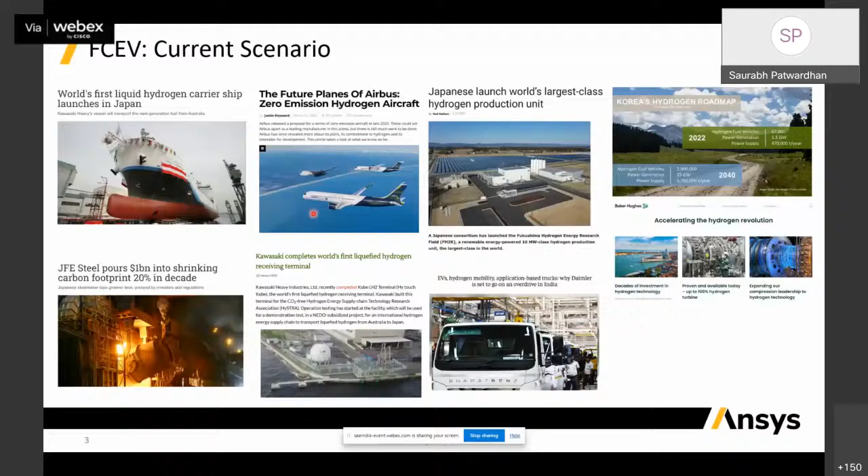So what makes hydrogen so attractive? I've compared two vehicles. One is the battery EV on the left hand side. The other is fuel cell EV from the Nikola company. Hydrogen is the lightest element and has the highest energy density. So you can see hydrogen has clearly one advantage, that is power per unit weight, making it suitable for heavy duty vehicles like trucks and commercial vehicles.

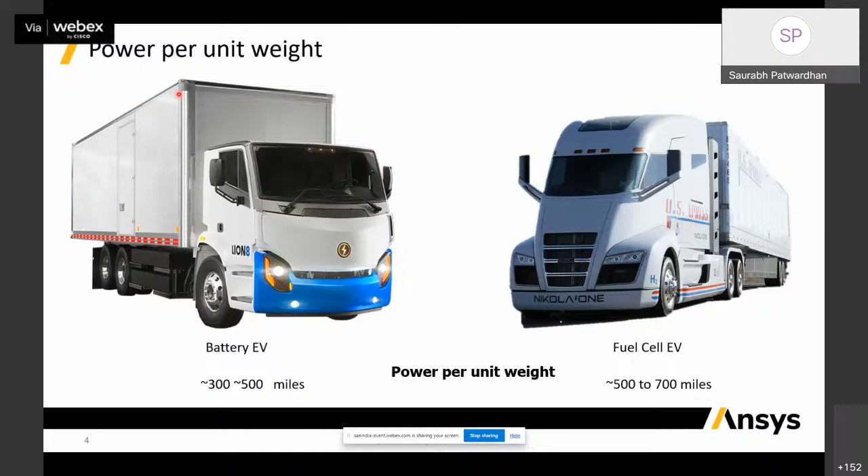It has longer range compared to battery electric vehicles. So if the typical battery EV for the same weight can go for 300 to 500 miles, the same fuel cell EV can go 500 to 700 miles. So there is clearly advantage there. That's why the hydrogen is extremely attractive. However, the picture is not completely so rosy.

So you can see there is a comparison of a battery vehicle on the top and the hydrogen car on the bottom side. So when you look at the overall efficiency, that is producing the energy using some green source, to transportation and storage, to taking it to battery, and then the power motor and transmission, the overall efficiency comes about 76% for a battery.

But if you take the same hydrogen car, starting with some green energy source, then doing the electrolysis and creating hydrogen, compressing it, storing it, transporting it, and then generating power using fuel cell, the efficiency reduces to around 30%. So there is a huge difference in the overall efficiency rate when you compare battery to fuel cell. And that's the major challenge that we have. So it has currently a very low efficiency due to high energy losses.

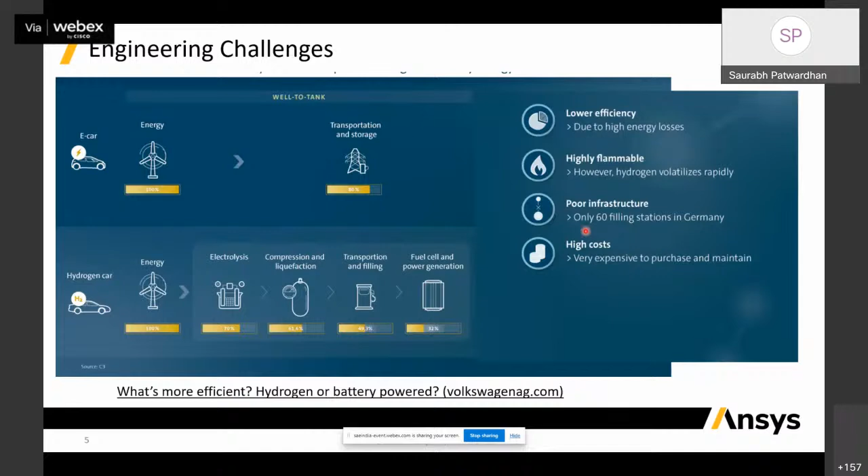The second thing that is challenging is that hydrogen gas is very highly flammable. Currently, the infrastructure is not present. So for example, in Germany, we have only 60 hydrogen filling stations. And expectedly, we have very high cost because there is no proper infrastructure in place. So that makes fuel cell extremely expensive.

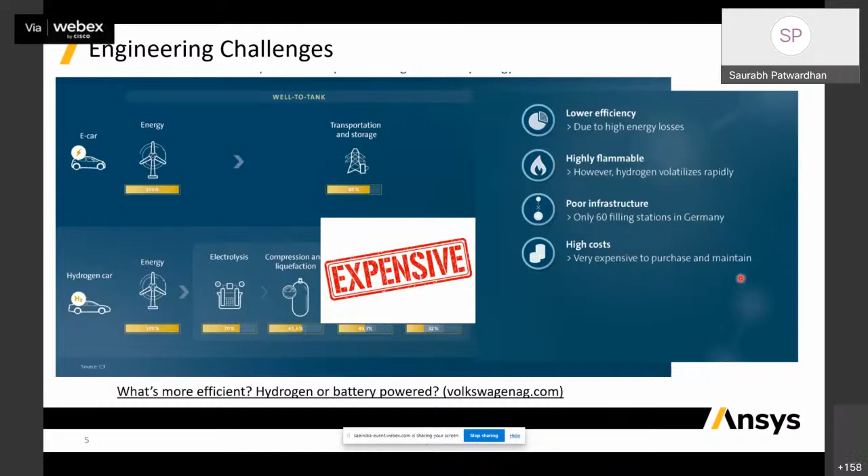And this is the engineering challenge that simulation can help to overcome. So for example, simulation can improve the design, optimize the design, and improve the efficiency. It can help in improving the safety, and it can help in reducing the cost of fuel cell vehicle. So that's why simulation has to play a very important role when it comes to accelerating the fuel cell vehicle development.

So this is a typical V diagram for design of any system. So you start with requirements and specification. So this is whole concept phase where you design the subsystem and the full system for a vehicle, and then go to the detailed design and optimization of each individual component that consists of the whole system. Once you do the whole component design, you want to check whether my design component is working fine. So you do subsystem integration and verification, and then you go to full system validation and verification to check whether it's working as per the requirements that I set out earlier.

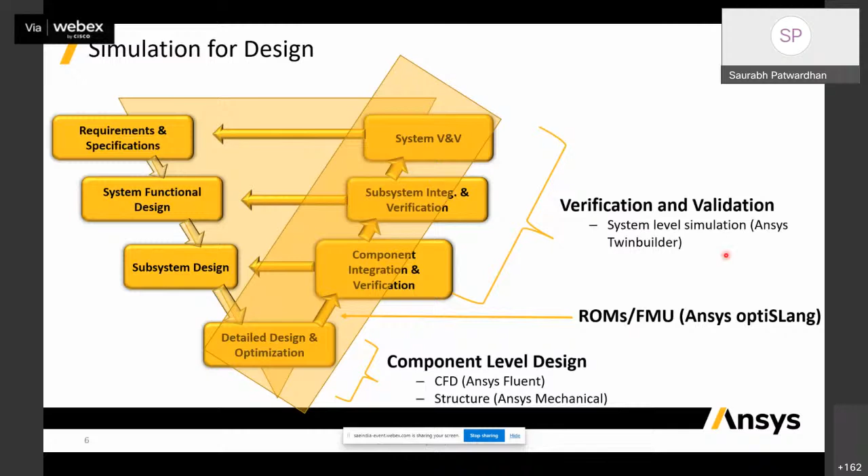In this webinar, we'll be focusing on the right-hand side part of this V diagram, that is the detailed design, then component integration and verification, and system level validation and verification, and how ANSYS tools can help at each of this step. So whether it is CFD, whether it's structure, whether it is creating the reduced order models, whether it is verification and validation. So we'll first look at component level design, mainly first from the CFD point of view, and then Dinesh will talk about the structural design.

So when you talk about the CFD modeling, what it does basically is it couples the overall design of cells and stacks and fuel cell systems, so overall engineering design, with the study of fundamental physical and electrochemical processes that happen inside the fuel cell. So here is an example of a fuel cell where you have this anode channel, you have cathode channel, where your fuel and oxidizer respectively come, and they react at the catalyst and produce electricity. So these fundamental processes are modeled when you talk about the CFD modeling, and that modeling will help you design the cells and stacks when it comes to full vehicle development.

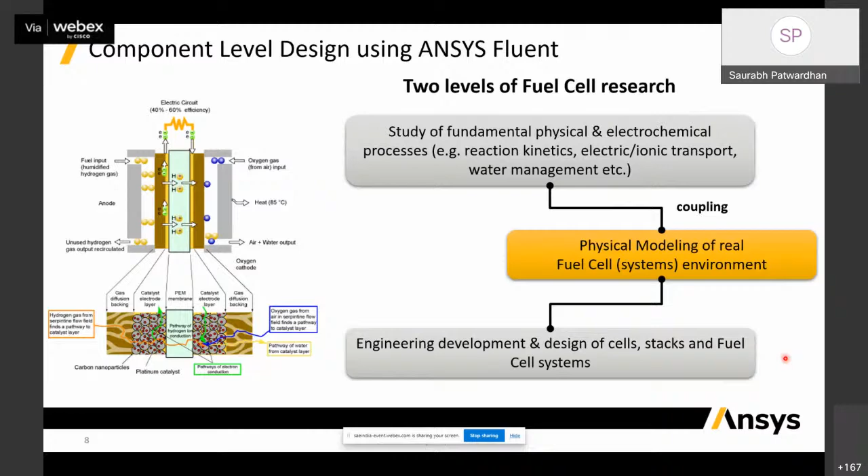So what are your design objectives when you talk about the CFD modeling? So you want to look at bipolar plate design, whether your channels will be single serpentine or triple serpentine or interdigitated. You want to look at how my species are distributed. I want to have as uniform distribution for species, current, and temperature as possible, so that my fuel cell is going to operate at highest efficiency.

Water management is extremely challenging when it comes to PEMFC because it operates at low temperature. So that is something that you want to optimize. Then there are different processes like osmotic drag and back diffusion.

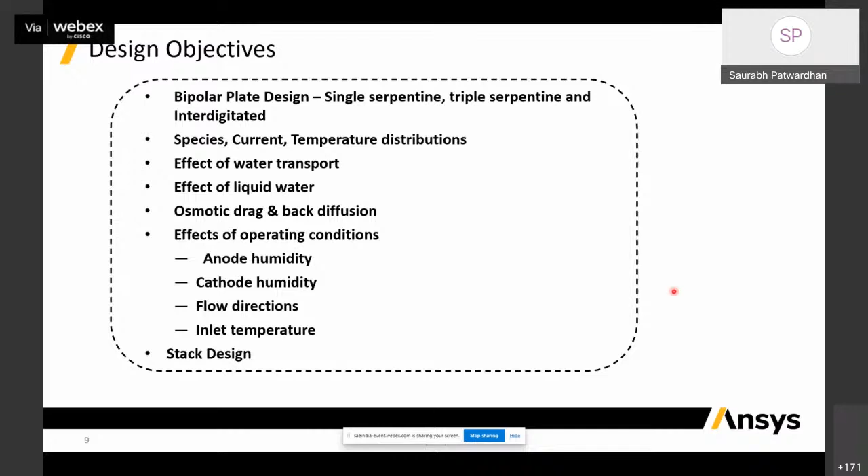Then you want to look at how the different operating conditions have an impact on the overall fuel cell operation, like anode humidity, cathode humidity, flow directions, temperature, and then you want to look at the overall stack design as well. So all these design objectives can be met when you do the CFD modeling of fuel cell.

So in ANSYS Fluent, what we do, we couple the flow simulation, that is the chemical species transport, the momentum transport, the energy transport, with the ANSYS Fluent fuel cell module, which gives the Nernst voltage, overpotentials, current density, and electric potential. So these two models are coupled through species and heat flux transferred from the fuel cell to the flow simulation, and the flow simulation then gives back to the FC module the species concentration and temperature.

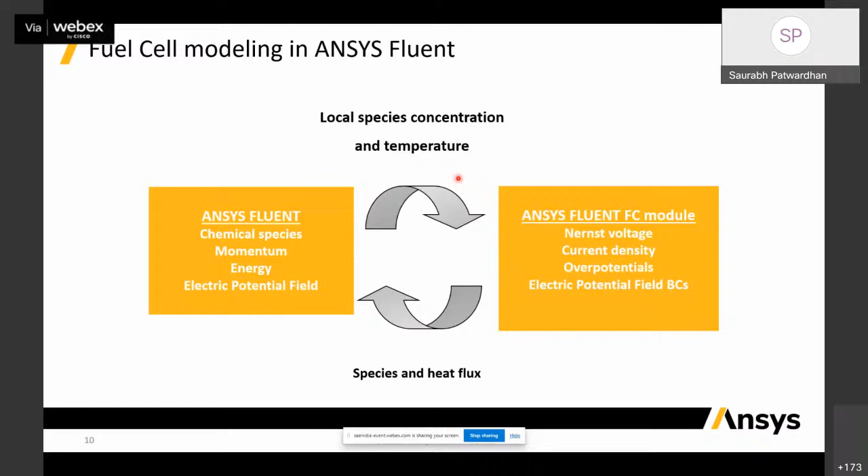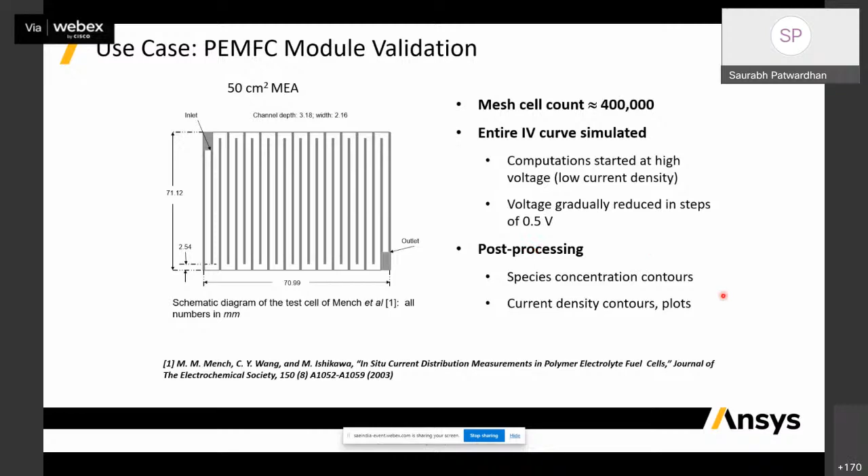Then we'll look at some use cases, how the PEMFC can help in not just validating, but understanding what are the different processes that are happening inside fuel cell. So this is a case from this paper, Mench and others. So you have this serpentine channel with 50 centimeter square MEA area. The total mesh count was around 400K. And we simulated this particular fuel cell at different operating conditions, looked at different post processing, and we'll look at how the insights that CFD can give to improve the design.

So first, this is the comparison of the polarization curve, the potential versus current. Again, we simulated it for different equivalence ratios on the cathode side, 1.5 and 2.25. So we can see clearly at lower equivalence ratio, the curve falls off at a lower current density. But at a higher equivalence ratio, it slightly continues longer to give larger current without consuming completely the reactants. But you can see the comparison is excellent with the experimental data, which are shown by these symbols. Similarly, we looked at current density at different cross sections. Again, the comparison is excellent for different voltage levels.

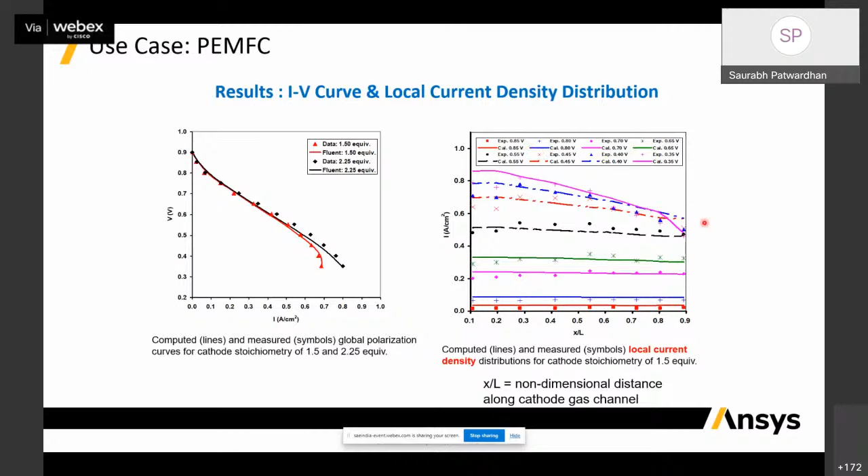But the most important point that I want to highlight is here. So this is the contour of current density on the plane of membrane. So you can see close to the inlet, you have a very high current density, of course, because of the availability of the reactants. But as the reactants are consumed, as you come towards the outlet, you see that the current density has become lower. Now, you may want to improve this and want to have more uniform current density distribution across the cross section from inlet to outlet. And those kind of insights can be obtained from such CFD simulations.

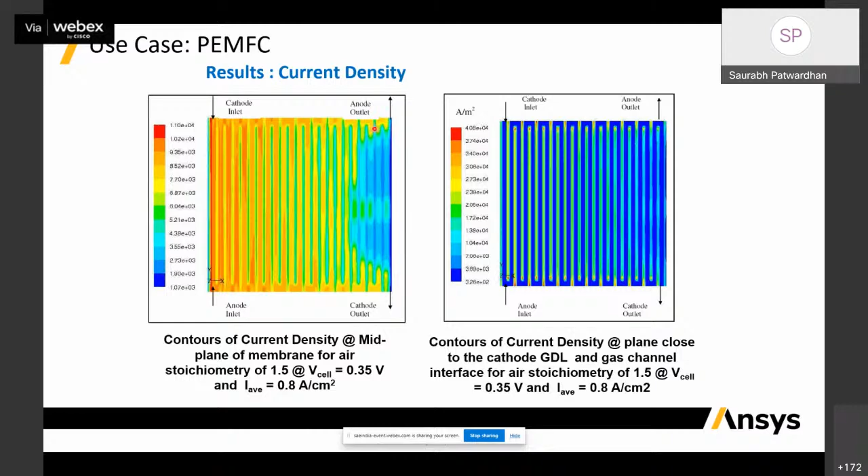Then we can not only look at a single cell simulation, but you can also look at stack simulations. So this is another use case of stack simulation. So we have 33 channels in a single cell, and 10 such cells are arranged in a stack to provide more voltage. So these are some of the details of the mesh and the CPUs. So ANSYS Fluent is a highly parallel solver, so it scales quite well. And this particular 16 million mesh model was solved on 96 CPUs and solved in 2 hours.

The important point I want to highlight here when it comes to stack simulation. So if you look at this bottom corner, we have plotted temperature contours at different planes, at a cross section and for different cells. So you can see because this is naturally cooled, you have cooling at the ends, so you have lower temperature there. But in the middle cells, it kind of heats up because not enough cooling is available here. So we did not have any coolants. It was naturally cooled in this particular example.

And this is something that any design engineer would want to avoid, because higher temperature is going to affect your other parameters like hydrogen concentration. So you can see there is a variation of hydrogen concentration across the cells. There is also variation in the relative humidity. There is a variation in the current density. So a design engineer will get such kind of insights from these simulations, and you can also design a cooling system that will avoid such situations.

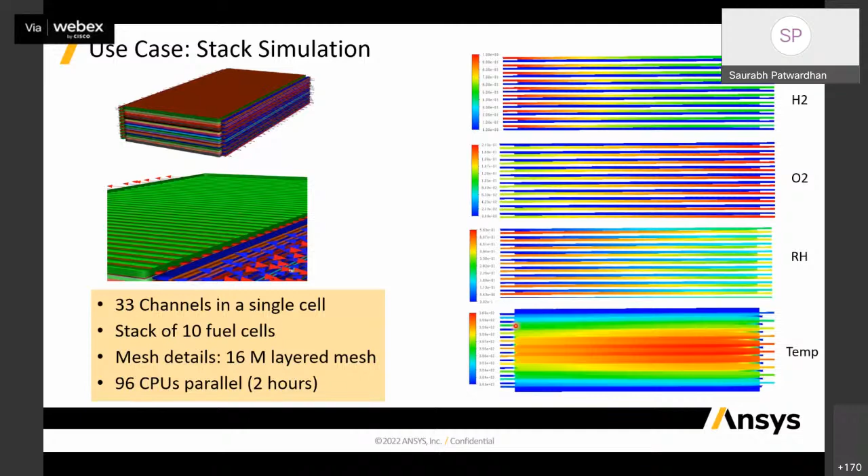So this was about the detailed CFD modeling, and then we will go to the system validation and verification, how we can achieve that using the ANSYS tools. So we'll look more into the behavioral modeling of fuel cell. So we looked at the CFD side. So we start with the mesh. We solve it in ANSYS Fluent using CFD. We get such data like polarization curve.

The next step would be to use this physics-based model, 3D CFD model, use that intelligence and put that into a system level simulation. And for that, you want to create a reduced order model. So what I mean by reduced order model is basically a functional relationship between some output variables that you want to test. It could be maximum temperature, it could be maximum relative humidity,

some operating condition parameter that you want to look into or control with all the input variables, like inflow, the pressure on the anode side, or maybe the surrounding temperature, or the relative humidity at the inlet. So those are your controlling parameters, and you want to look at the output. So we want to create that using our physics-based model. And then once you create this reduced order model, or functional mock-up unit, as it is called sometimes, you can put that into a fuel cell subsystem model.

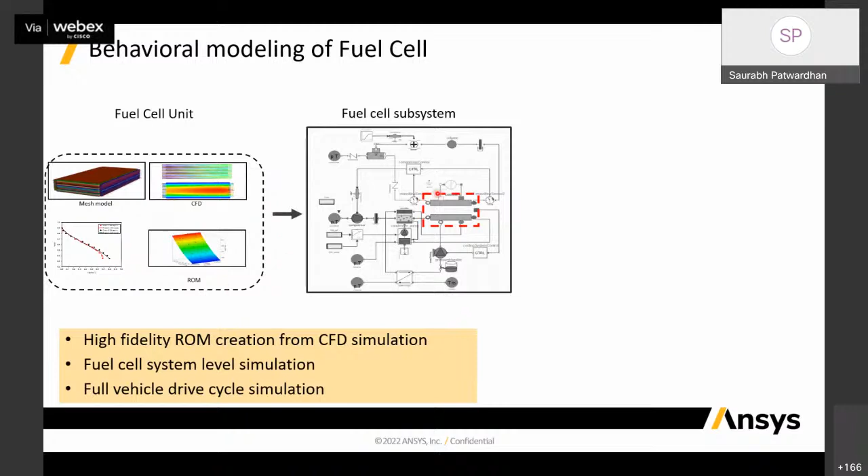So this subsystem model has different components, like it has anode side circuit, hydrogen tank, then there is a cathode side circuit where there is a compressor, there is a humidifier, there is a condenser, there is a cooling circuit here, and so on. So this particular intelligent data is going into my fuel cell subsystem model for a system level simulation.

And once you do that subsystem level verification, you can integrate this subsystem model of fuel cell into a full vehicle model, which is shown here, which has other components like battery, it has a car, and traction motor, and so on. So this is for a full vehicle model. But the important thing is that you are using a very high fidelity reduced order model that is coming from your actual design.

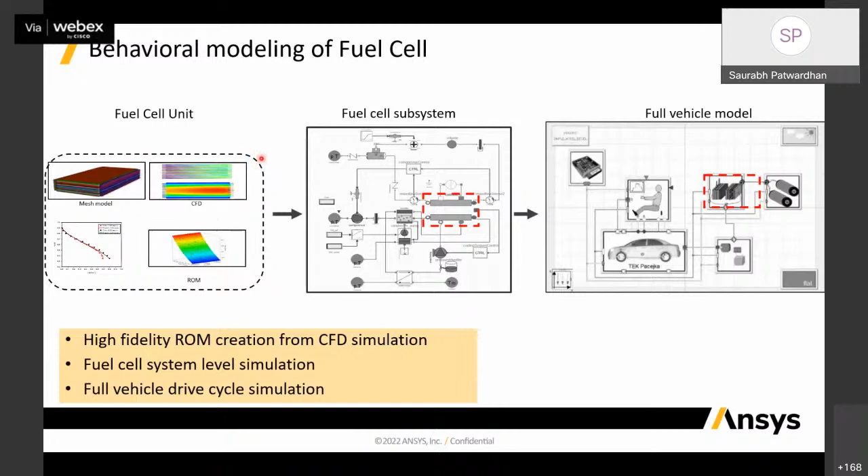So how do you do that? How do you create the ROM? So we have a tool called ANSYS optiSLang, which can allow you to do a design optimization, not only design optimization, but you can create a design of experiments. So you can create different samples for different input parameters. So here we have selected 4 different input parameters, like inflow of hydrogen, inflow of oxygen, voltage stack, and the relative humidity on the cathode side.

And these are several output parameters that you want to look at when it comes to system level simulation. It could be total current, it could be temperature, relative humidity, it could be outflow, oxygen content, average temperature, and so on. So you can create a design of experiment. So here we had 30 design points, and create a dependence table, for example. So how the output parameters are dependent on the input parameters that I provided.

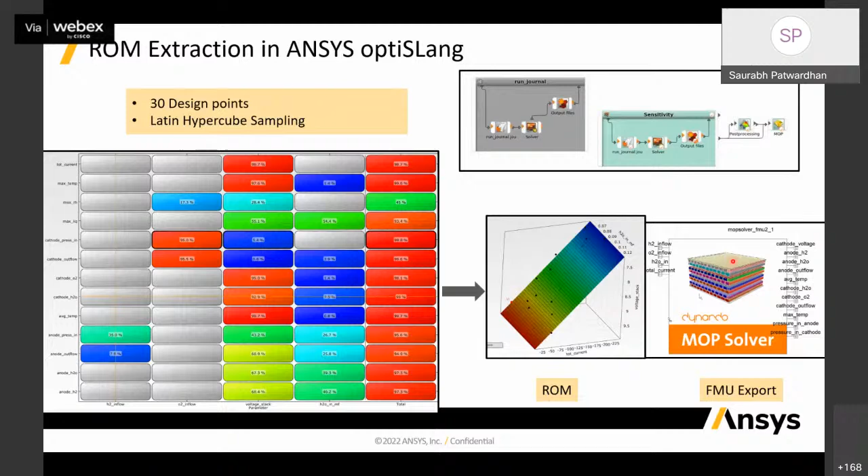So for example, the current is almost completely dependent on the voltage. But there are some variables like inlet pressure on the anode side that is dependent not only on voltage but also on the relative humidity at the inlet, and also the inflow value. So this kind of dependence matrix you can create, and then that is basically your ROM, reduced order model. So that is the functional relationship between the input and output parameters that you can export for a system level simulation. So this is the FMU that I'm talking about, with inputs and output parameters.

Not only that, you can also look at things like safe envelope. So here is a volume chart where the maximum temperature of a fuel cell is dependent on three different input parameters: cathode flow rate, stack voltage, and inlet water mass fraction. So in this particular example, suppose I don't want my fuel cell to operate at a temperature that is greater than 340 Kelvin. So this is basically my boundary surface.

So I don't want my fuel cell to operate in the region where the temperature would exceed this 340, that is the safe operating limit. So I don't want stack voltage, for example, to go below 8 volts. So this is basically a 10 cell stack. So for each cell, it should not be less than 0.8 volts, for example. So these kind of studies can be done, and you can devise control strategies. So for example, if my voltage is going below 0.8 volts, what should be my control operation, or what should be my strategy so that it comes back in the safe operation limit?

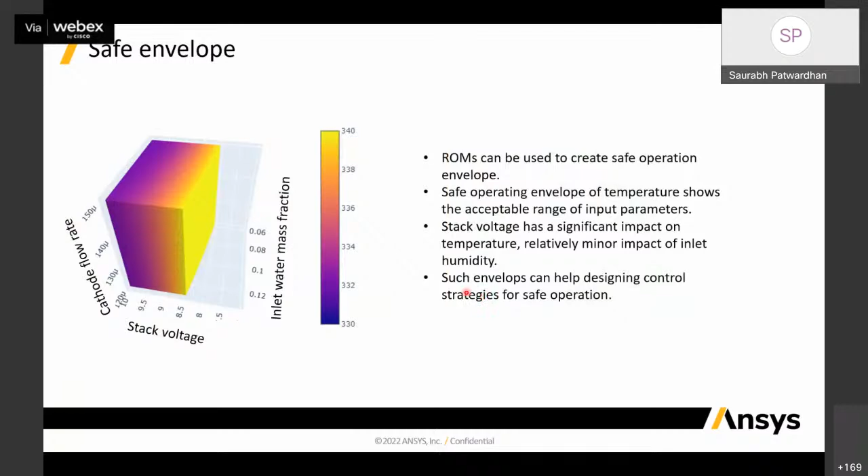So these kind of studies can be done using the design of experiment models. Another important point: we first looked at point ROMs, where there was one input or multiple inputs and an output, which was a single number. But you can also look at a 3D ROM, or a field ROM. That can be created using ANSYS Twin Builder.

The advantage of a 3D ROM is basically that you don't really have to do expensive CFD simulation again and again. You do simulations for only 30 points, and you can get the 3D field data at any other point for which you have not done the simulation. Such field reduced order models, or 3D reduced order models, can be built using ANSYS Twin Builder.

Here is an example of mass fraction of hydrogen at a cross-sectional plane. The top one is the CFD result, and the bottom one is the ROM result. You can see that it's fairly accurate when it comes to 3D ROM. It's almost as good as CFD results, but constructed using only 30 design points. Similarly, these are the CFD and ROM results for oxygen.

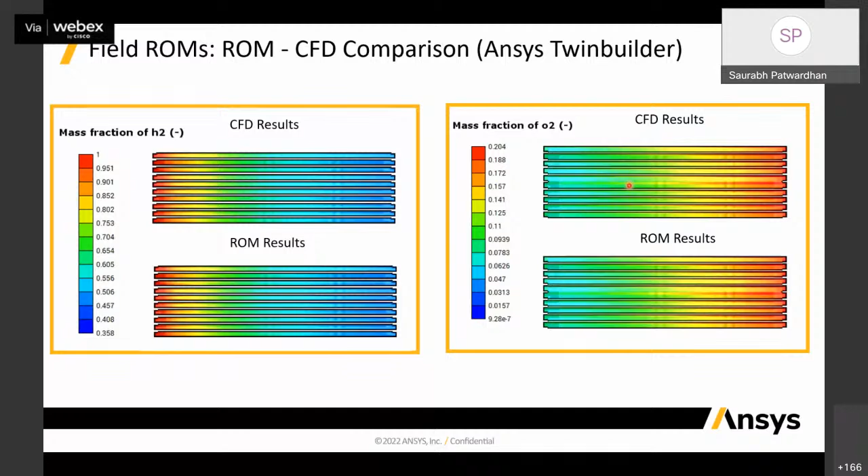If you look at the error, in the H2 ROM we only have an error of 5.5%. In the O2 ROM, it's 6.7%. But the great advantage is that you really don't have to run these simulations again and again, and without that, you can even look at the 3D field.

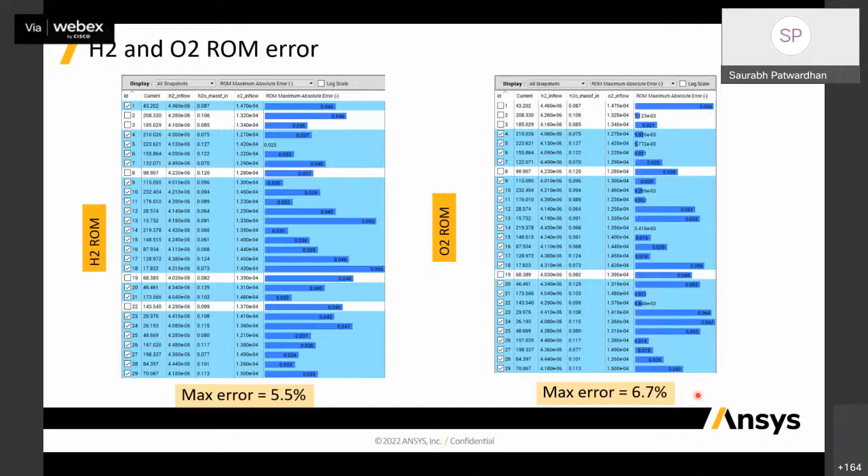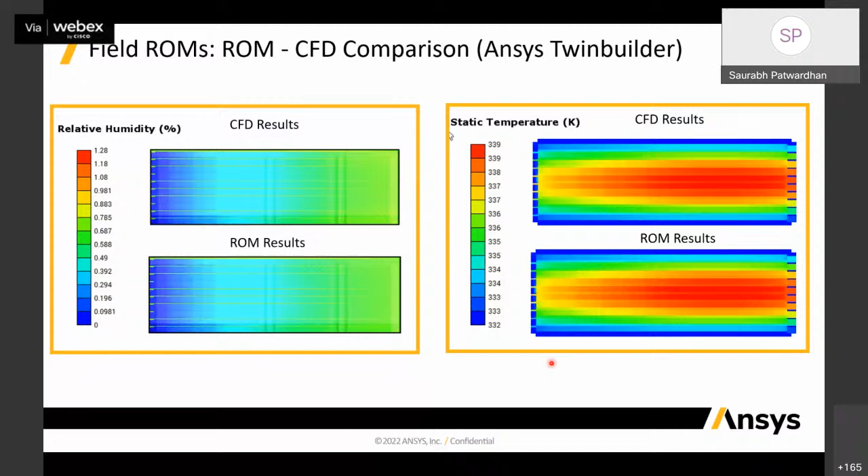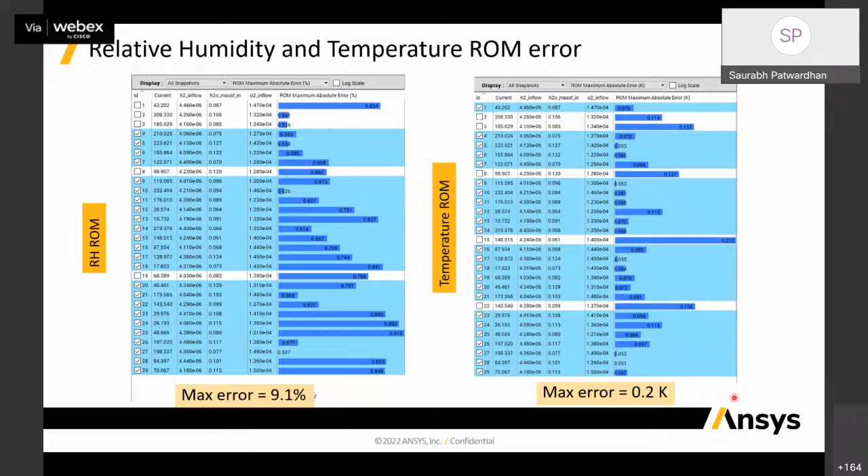Again, this is another example of a 3D ROM where we looked at relative humidity in the fuel cell and static temperature. Again, we see a very close comparison between the CFD and ROM results. In the relative humidity ROM, the error was 9.1%. In the temperature ROM, it was about 0.2 Kelvin. So that's how close the two results are.

So this was all about ROMs. So how do we use these ROMs? We can use these ROMs in a system level simulation. We can devise control strategies. We can ensure the safe operation of the fuel cell. This is the ROM that we extracted from our physics-based model in CFD, and it has been used in a system level simulation, which I showed earlier. You have this anode side circuit and this cathode side circuit. We have just put it in a block here. And this is how a fuel cell subsystem circuit can be created and simulated.

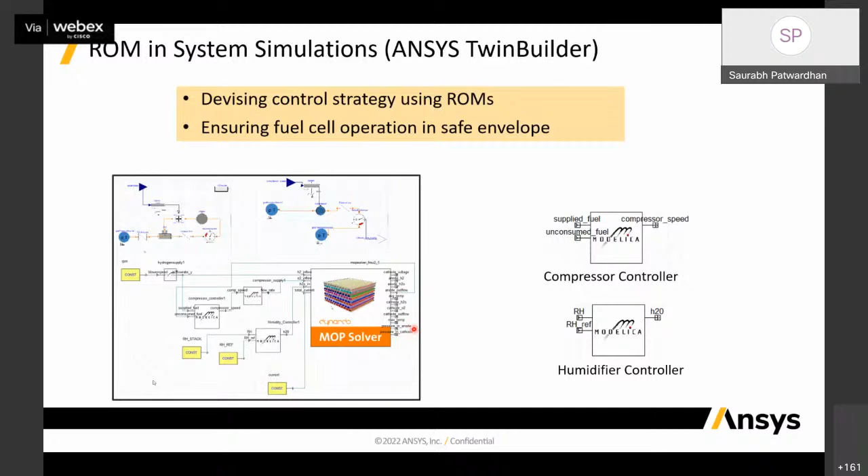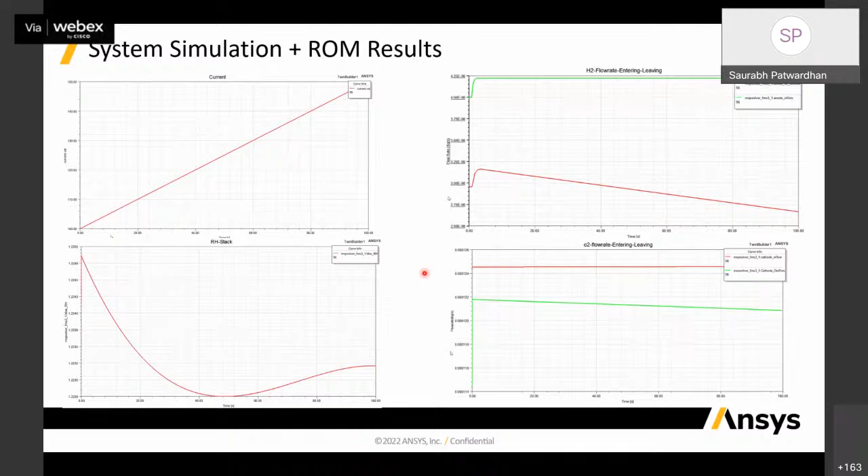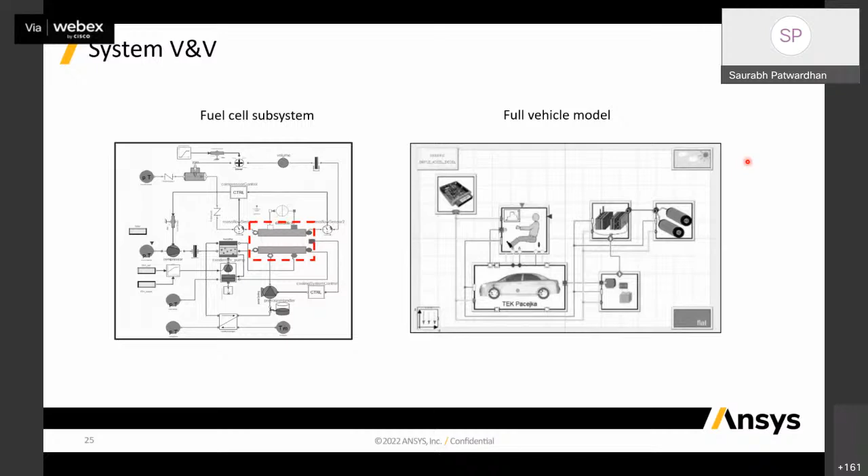So to summarize, we looked at component level design. We looked at how CFD can give you insights in component level design. And the same CFD or intelligent model that we built can be converted into a reduced order model for a system level simulation in a fuel cell subsystem. And the same can then be taken up in a full vehicle model where you integrate all the parts like battery, traction motors, power electronics, and so on for an electric vehicle. So that's the summary. I then hand it over to Dinesh for the structural design part.

Thanks, Saurabh. I will share my screen. Okay, hope my screen can be seen.

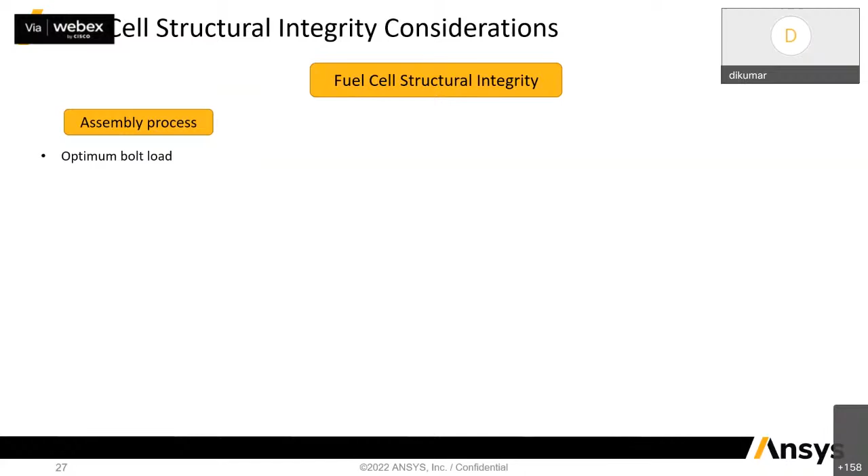Sure. Thanks, Saurabh, and let's talk about the structural design. From the structural integrity aspects, there are a lot of requirements for the fuel cell, just like we have for the IC engine and any other kind of structure. So we have tried to bucketize them into three major buckets from the structural integrity requirement point of view. One is the assembly process requirements, in which engineers are very much interested to determine the optimum bolt load. They want to perform trade-off studies between conflicting parameters like contact resistance, GDL porosity, sealing compression, component stresses, strains, etc.

Want to ensure the uniformity of the contact pressure between the cells, how the end plate design can affect the assembly parameters, number of the bolts, how should they be placed, also the gasket, like what should be the optimum thickness and which material is good for the application that is being designed, or number of the cells and their

impact, and also, just like I showed, developing the reduced order model so that you don't need to run the simulations again and again to establish the relationships between the compression load, contact resistance, porosity, and again also more detailed simulations to estimate the material properties of complex materials like the MEA assembly, and then do a detailed simulation and so on. So these things can be captured using the implicit solvers, multi-physics capabilities, and tools like OptiSlang.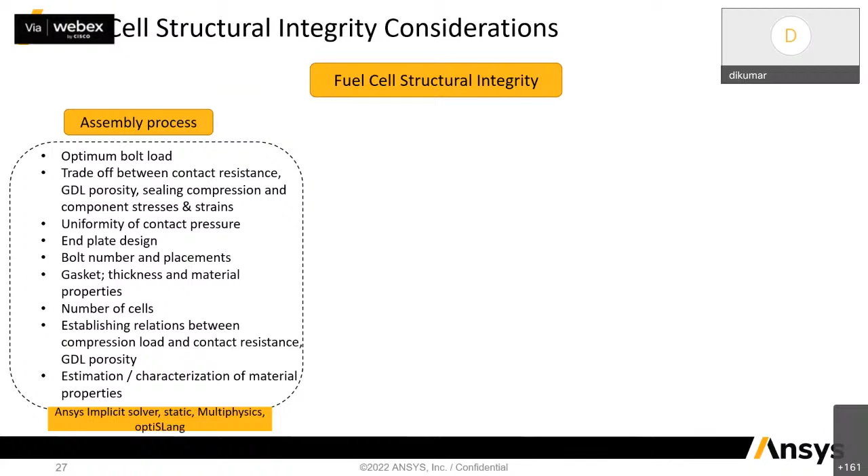Then the second bucket is fatigue durability and dynamics, where engineers are interested in determining the natural frequencies of the system to make sure that the natural modes don't align with that of the excitation modes. The fatigue when it is subjected to tension, torsion, and bending kind of loads, thermal fatigue because when you switch off and switch on, the temperature rises and goes down, so it is subjected to thermal cycling, fracture characteristics to make sure the design is damage tolerant.

Since the structural parts are immersed in the fluid, some parts may soak the fluid and then swell. So how the stresses can be developed, and how the material degradation can happen, the random vibrations which can be coming from the vehicle, how that can impact the design, and thermal and creep relaxations over a period of time, how much the sealing would be preserved and so on. So we have capabilities to do this using linear and nonlinear dynamic solvers, Smart Fracture tool for damage tolerance, nCode for fatigue, complex material simulations, including viscoelasticity, plasticity, and so on.

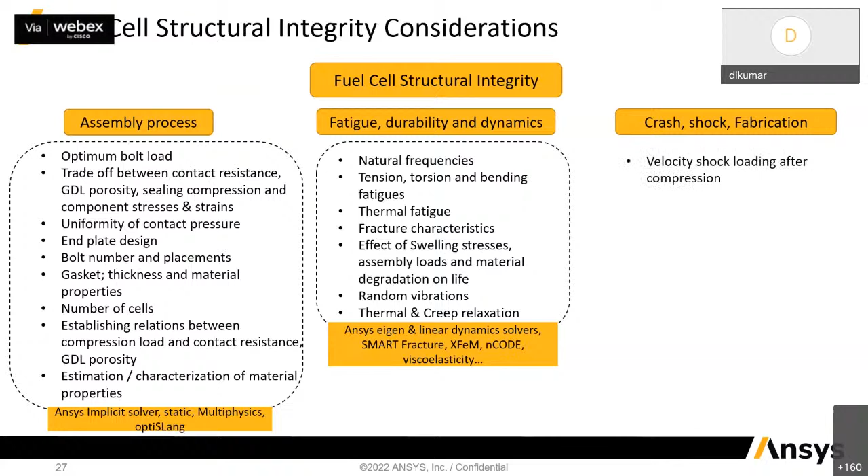And the third bucket is crash, shock, and fabrication aspects, where engineers are interested in evaluating the structural integrity when it is subjected to velocity shocks, sudden accelerations, thermal shocks, drop test, crash kind of simulations. Just like Saurabh stated, it's very highly inflammable, and in case of accidents, the hydrogen tank should not burst. So is it placed optimally inside the car? Some of the fabrication things, like complex parts like bipolar plates. So we can use explicit solvers like LS-DYNA to do these kinds of simulations.

So it is apparent that when you go from left to right, the modeling complexities and challenges would increase, and it needs more experienced CAE engineers to perform these tasks. But if you come to the left-hand side, the modelling complexities would reduce, but actually the simulation requirements are high, and the left-hand side things are done more repeatedly. But it doesn't mean that right-hand side things are not done. It's just that left-hand side things are the initial things and more repetitively being done.

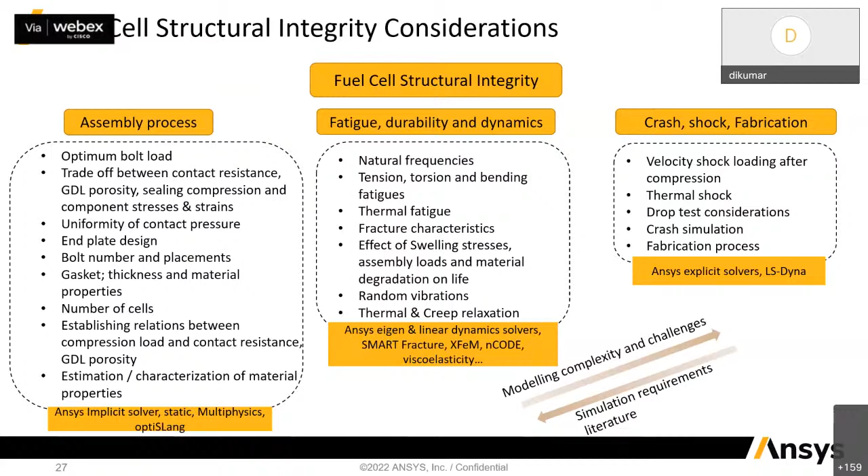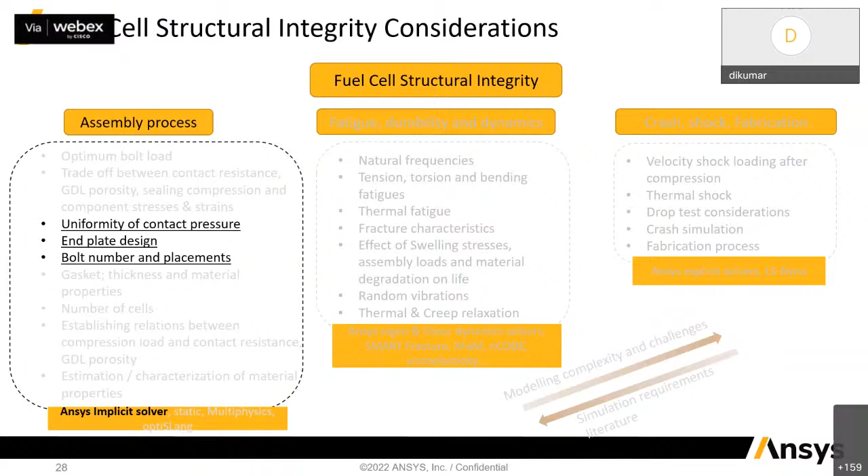So that's why in this presentation, since it's a very broad topic and we have limited time, I plan to capture only some of the fuel cell structural modeling aspects, specifically from the assembly process point of view, but most of them are also applicable to the other requirements as well. And we will consider mainly how we evaluate contact pressure, how the end plates can have an effect, and how the bolt load gets distributed over the bolts for uniform compression and so on. So let's see the typical structural modeling aspects for the fuel cell. A fuel cell can have a single cell or it can have multiple cells.

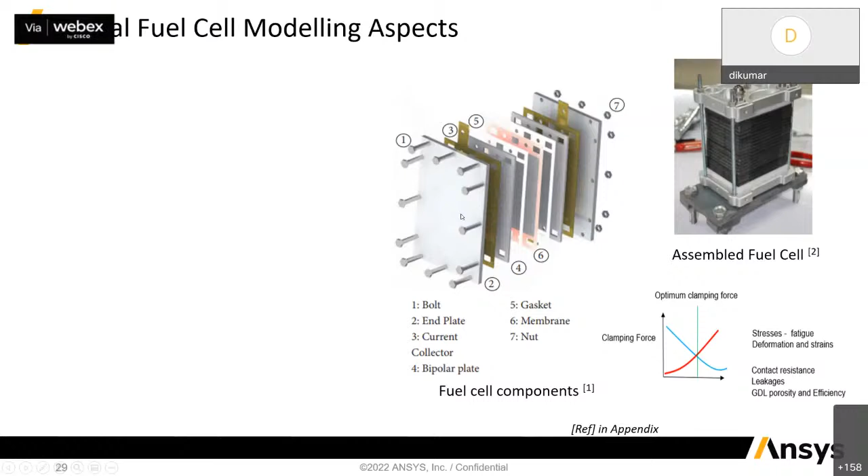Mr. Dinesh, we are not able to hear you. Mr. Dinesh, we are not able to hear you. Just a second. Maybe there is some issue with the network. So I'm checking with him. Just give me a minute. No, Dinesh is not there. Not able to hear what he's talking about.

So you should have the capability to assemble them, and also be able to apply displacement or force controlled loading and see the behavior. So even the assembly process seems easy, but it has a lot of conflicting things. Take the example of clamping forces. If you increase the clamping force, it increases the stresses and deformation, which may not be good, but it reduces the contact resistance and propensity of leakage. But at the same time, it may reduce

Mr. Dinesh, we are not able to hear you, Mr. Dinesh. I think... Hello, you'll have to log in again.

Can you hear me? Mr. Saurabh, can you inform Mr. Dinesh there seems to be some problem at his end. I can hear him actually. I think the voice is clear. I think I can see the chat. Go ahead, Dinesh.

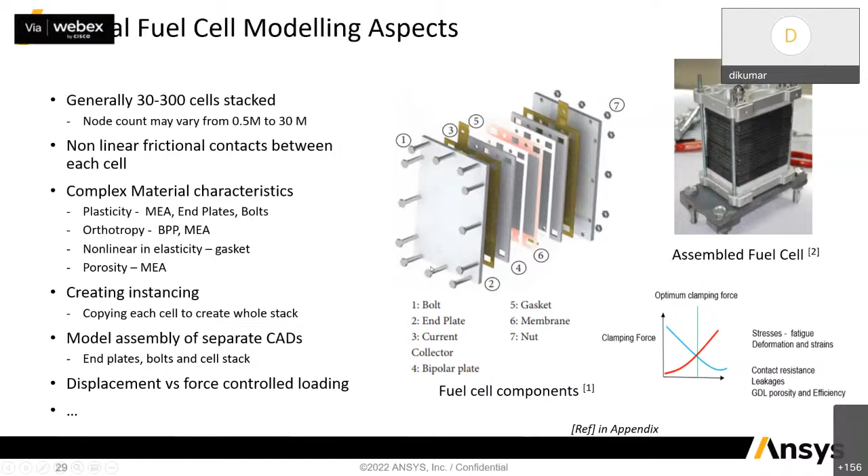We have to manage the conflicting requirements in the assembly loading given. So we created a demonstration for a 40 stack model to demonstrate the fuel cell modeling in assembly loading. The important components we considered are the end plate assembly, bipolar plates with flow channels, MEA modeled as a homogeneous material, gaskets, and bolts.

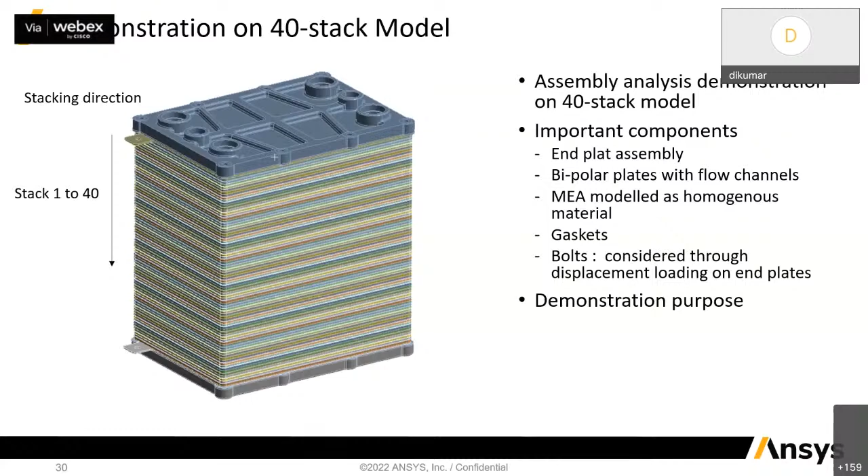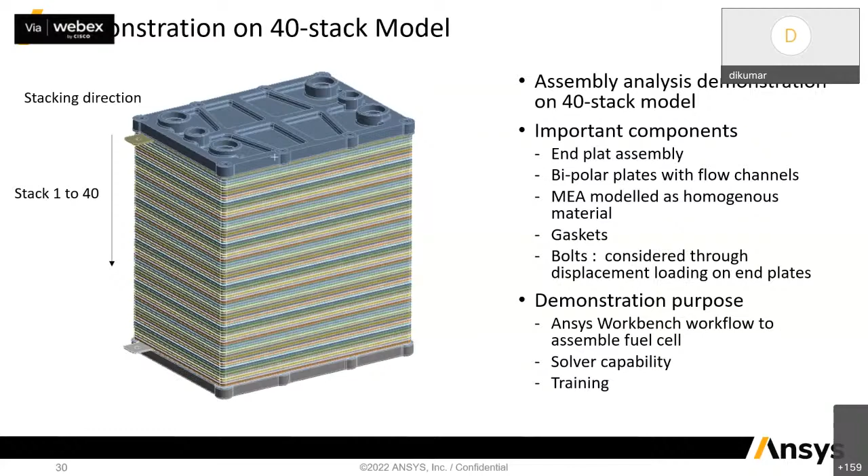Some of the components don't need their actual geometry—you can take their effects using boundary conditions, which comes under the idealization steps that help reduce model size. The demonstration purpose is to show seamlessly the workflow in ANSYS Workbench, a framework to connect multiple ANSYS products and solver capabilities. If you're interested to learn more, we can help you—we use this as training material in detail.

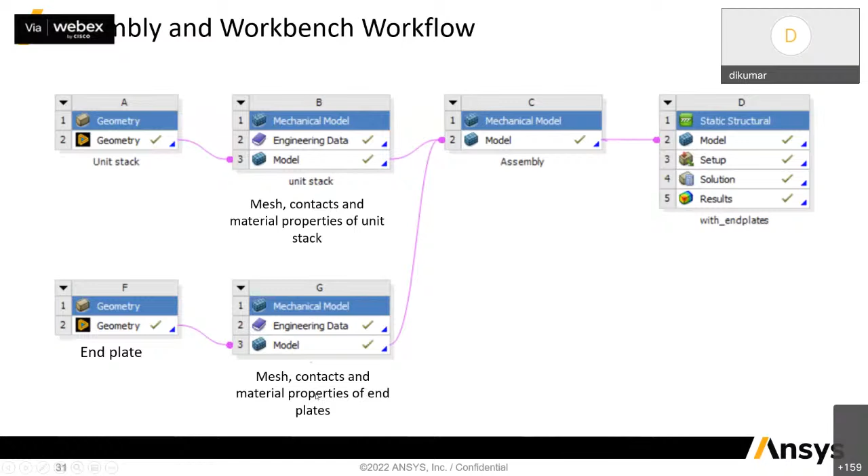These are just a few clicks you need to do. Since I have 40 stacks, I can create 39 additional copies of the whole model—not just the mesh, but also the contacts, material assignment, and everything. Then I place them with an offset equal to the thickness of the single cell, and proceed to do detailed modeling, applying the overall loading and boundary conditions, and run the simulation.

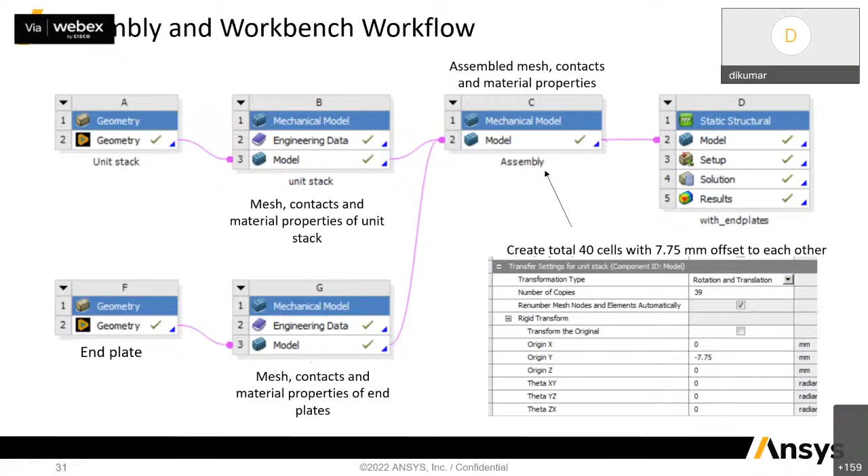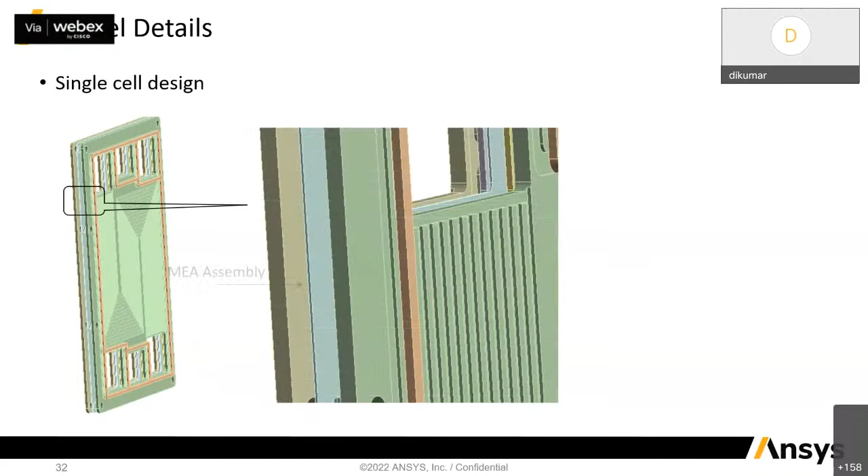Let's look at a closer view of the single cell. For the single cell, we considered the MEA assembly as a homogeneous material, along with bipolar plates, gasket, and flow channels—this poses challenges for meshing, but ANSYS meshing techniques handle it very well. For the gasket slots and thickness, the gasket opening we considered for this demo is around 0.25 mm between the bipolar plates and between the bipolar plate and MEA.

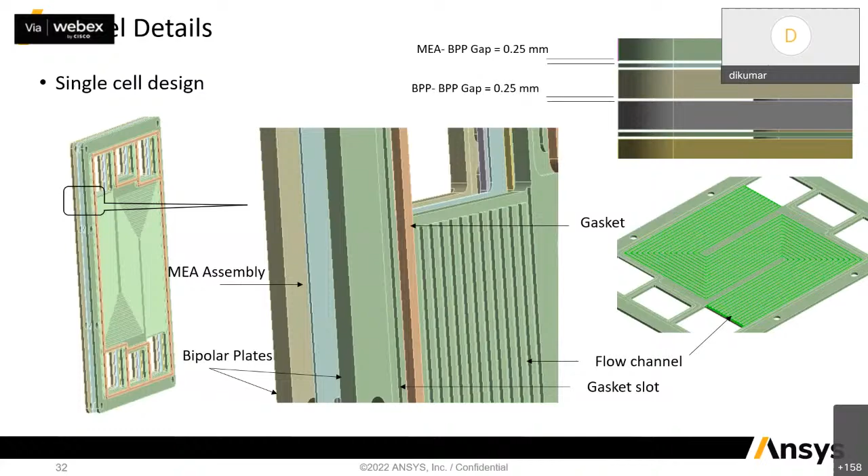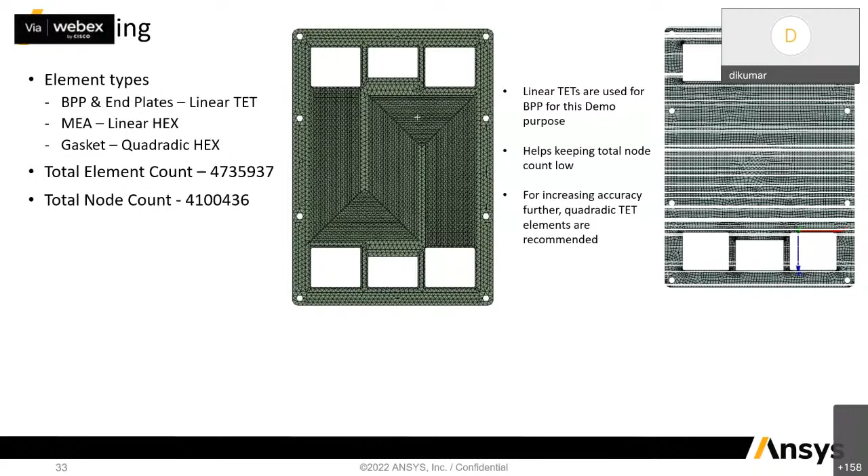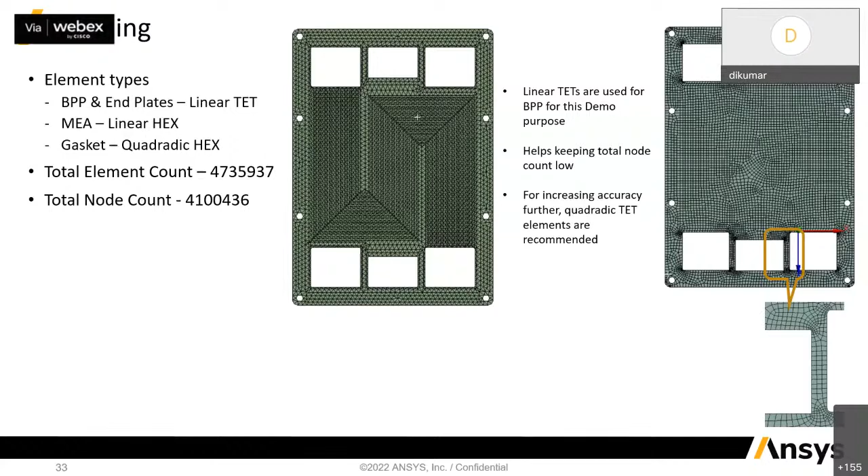For the bipolar plate, we used tetrahedral mesh because of the complex serpentine flow channels. For the MEA assembly, we used hex meshing, and we need good quality mesh at areas of interest, like where we're measuring stresses at corners, and the gasket needs at least two elements across its thickness so we don't face convergence challenges, while still capturing the gasket's stiffness well.

We took material properties from an international journal paper, and for the assembly process they are assumed linearly elastic. However, we can account for more complex material properties. For the gasket, the Poisson's ratio is very near 0.5, meaning it is nearly incompressible and very soft compared to the other materials.

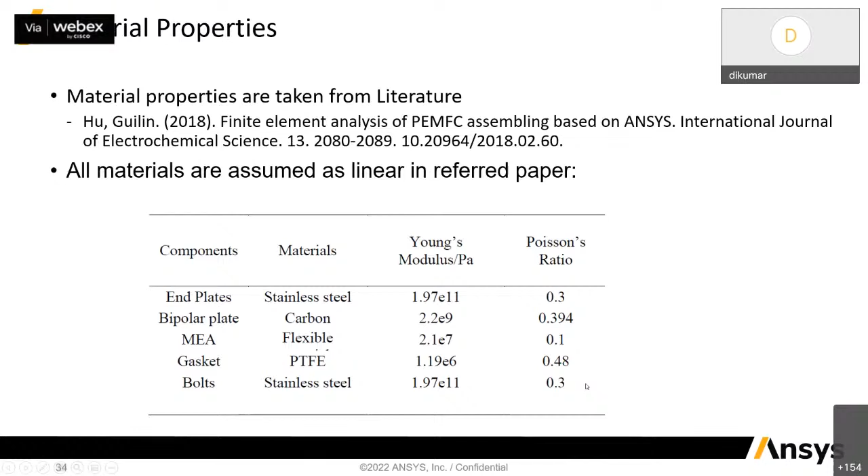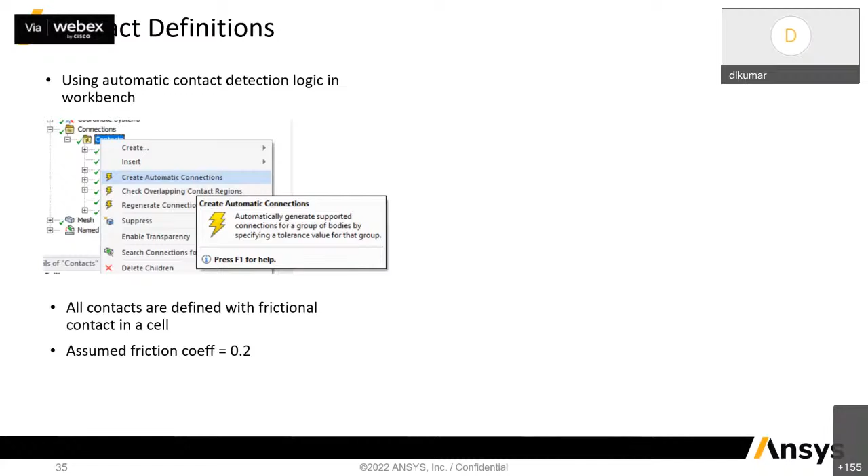Since there are many parts, we use capabilities like automatic generation of connections between parts, where the tool automatically identifies the nearest surfaces within tolerances and defines things like contacts and other connections. For smooth solution modeling with very soft parts like the gasket, we need specific contact settings that handle soft materials nicely.

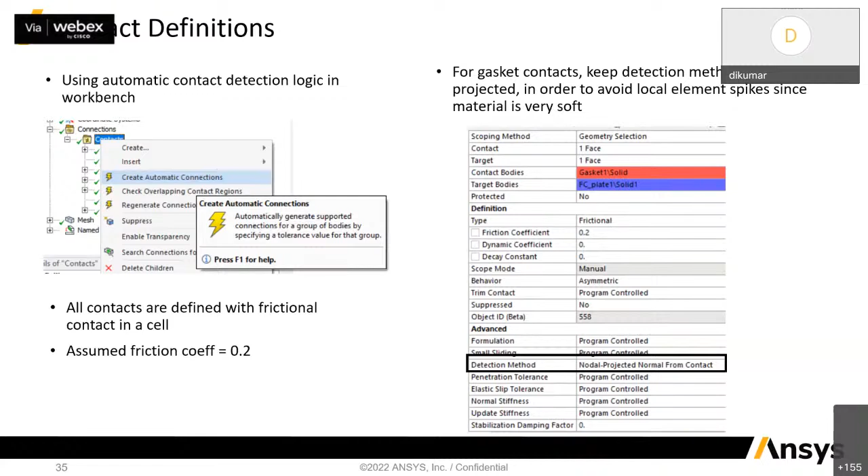Once we go into ANSYS Mechanical from the Workbench, you can see the actual model details, where every cell is very nicely segregated into the trees, cell by cell.

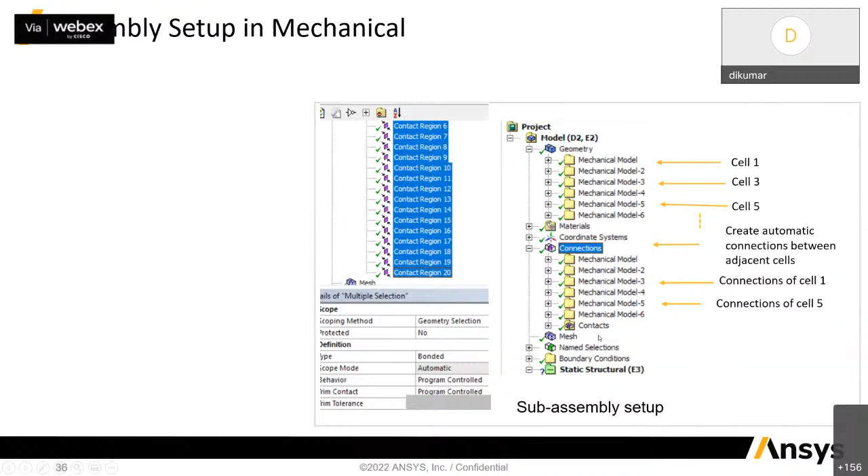And then you have the contacts from every cell. You can view and change them if needed. We can also use the automatic contact creation capability to define the contacts between the cells. These are the contacts for a particular cell. A cell can have multiple parts like gasket and bipolar plates, you need to define the contact, and then between the cells also it gets automatically created.

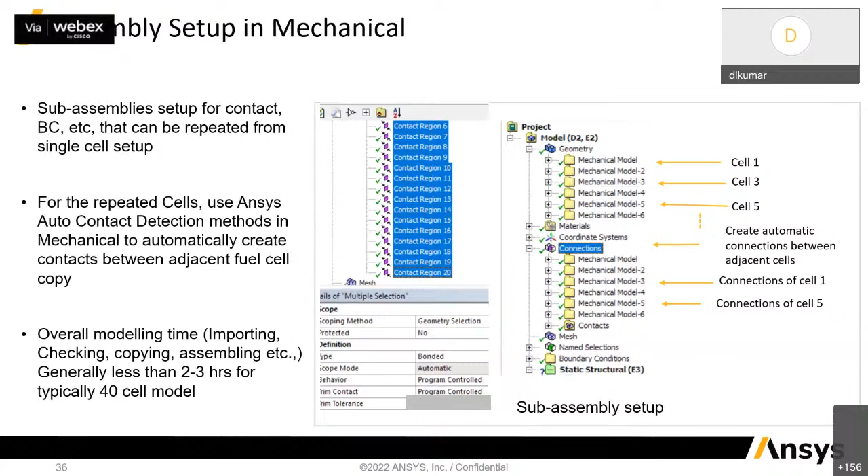So the whole modeling time for at least this model is like 2 to 3 hours, thanks to this automation that has made it easy. Otherwise, picking up the surfaces and defining the contacts, and then picking up every part to define material property, that would be very difficult. So the instancing and all those things help, and the computer does most of the job. That makes life easy.

Then from the boundary condition perspective, for the fuel cells, during the assembly we can fix the end plates in plane directions. For the bolt, we can apply the displacements from both directions. How much displacement we should apply depends upon the gaps between the bipolar plate and gaskets. In this case, the total gap was around 30mm, so we apply 15mm of displacement from both sides. This closes the gaps, and we need to apply additional preload to generate sufficient contact pressure between the cells so that we avoid leakage of the fluid. That's why an additional 10% of the bolt displacement is applied in the second load step.

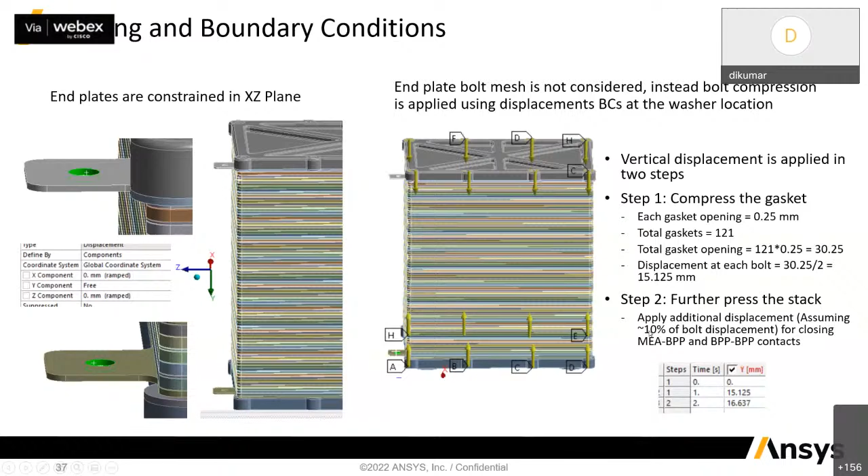The model solved smoothly. We used around 192 cores. It solves in around 4 hours, and it captures the physics nicely. It compresses, and you can see the load displacement behavior of this fuel cell stack. It's highly nonlinear, and we need very sophisticated solvers to capture this phenomena.

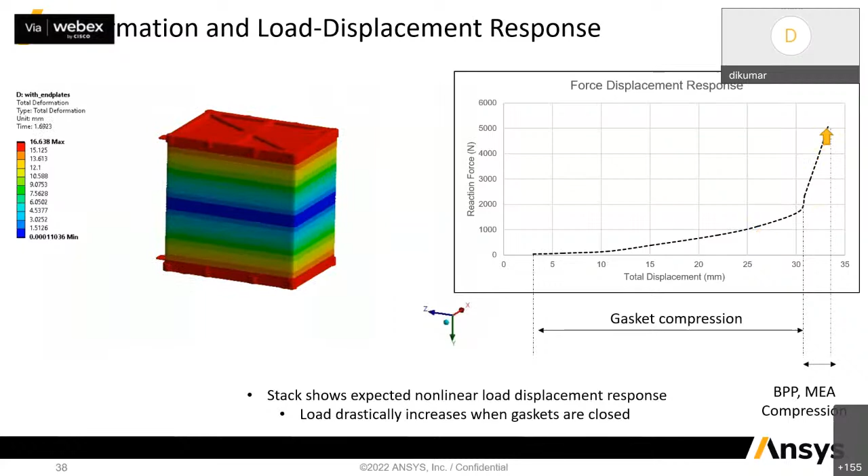During the gasket compression, the nonlinearity is still moderate, and you need less force since the gasket is soft. But once the parts come into contact, like two bipolar plates, or bipolar plate and MEA, you need to apply additional force. So even for small displacement, you need to apply huge force to generate the contact pressure. This behavior is captured nicely.

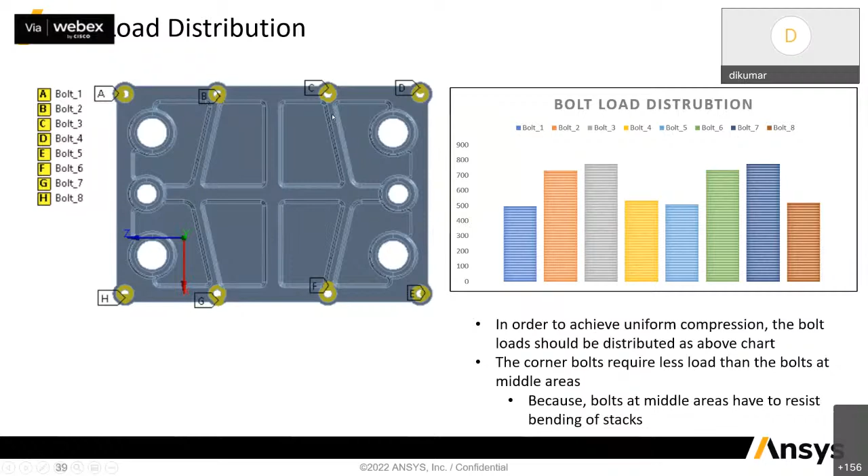In order to achieve uniform compression, since we applied the same displacement at all the bolts, let's evaluate the bolt preload. It suggests that the corner bolts would have slightly less preload compared to the bolts at the middle. That's because when we compress the cell stack, it may cause bending, and because of that we may need to apply additional force at the middle bolts to prevent the bending and compress it uniformly.

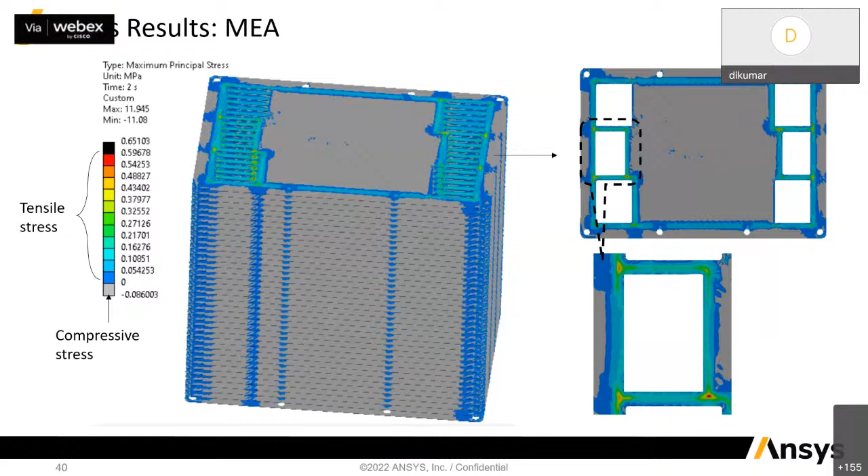Then we can view the stresses and strains. It shows that because of the compression, most of the MEA area goes into compression, but there are still areas, look at these kinds of areas, where the geometry is being changed by the gasket. There is a geometric discontinuity, and it causes tensile stress. We need to be watchful of this kind of areas.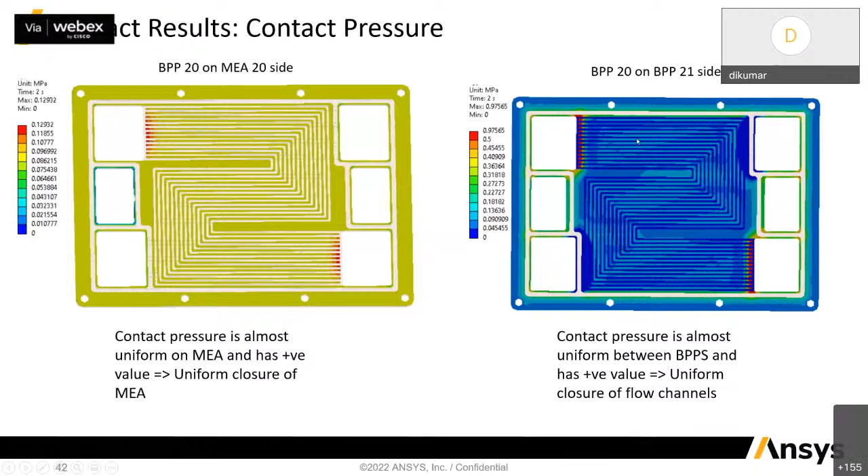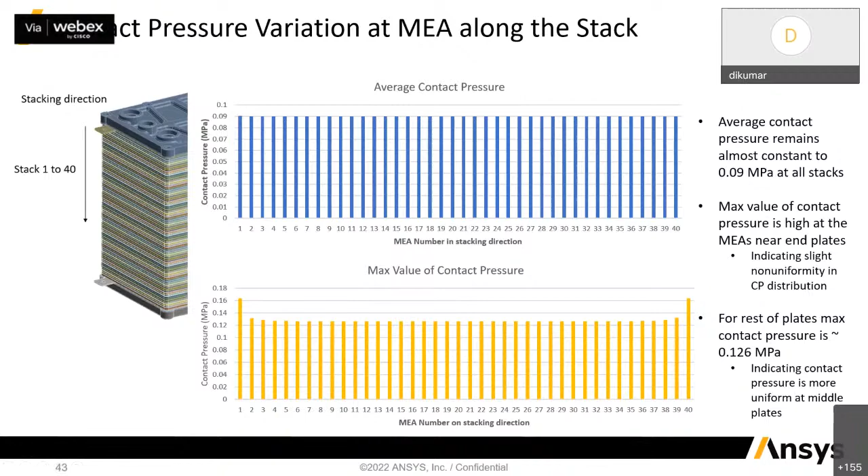If you see the end fuel cells, the maximum contact pressure is high and the average value is a bit less, meaning the contact pressure may be non-uniform for these cells. But as you go towards the middle, it becomes more uniform, where the average and maximum pressure are not that different. So these plots help us understand how contact pressure is distributed across the cell stack.

But when you employ the end plate, you need to make sure its weight is not too much, while at the same time the stiffness is sufficient. So we need enough rigidity in the end plates to achieve uniform compression across the cells, as well as to ensure there are no areas where contacts are open with a propensity for leakage.

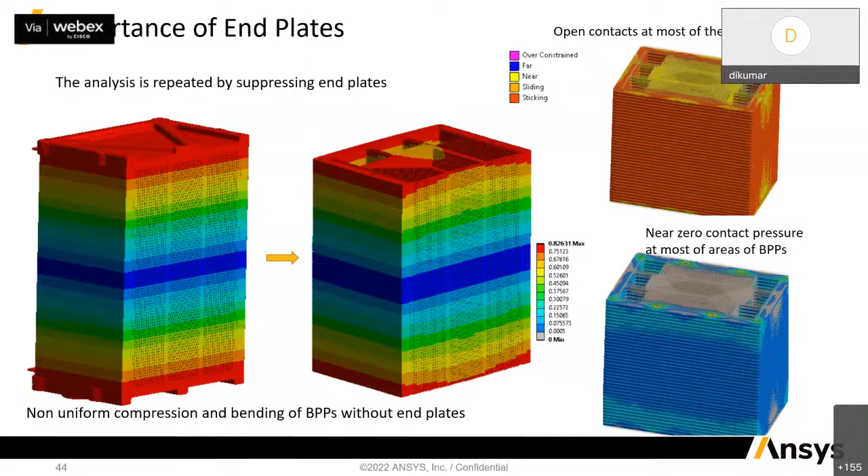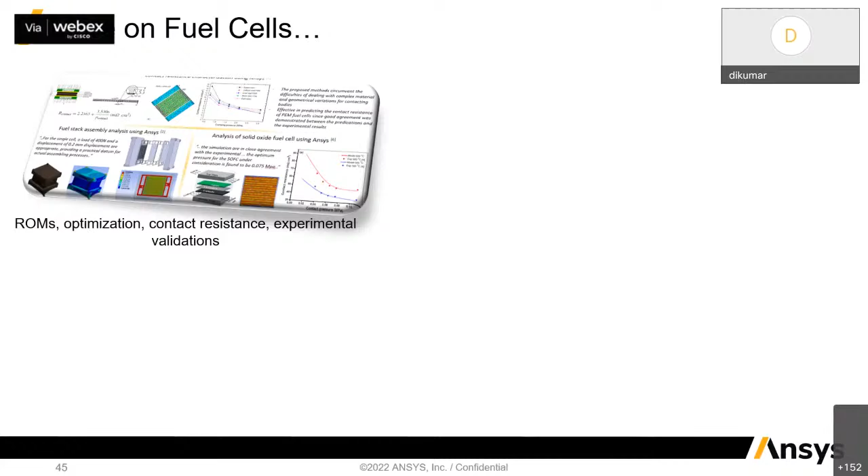So this is all from my side. Since time is limited, there is a lot of literature available which suggests using ANSYS to do detailed calculations like producing ROMs, optimization, contact resistance calculation, experimental validations, fracture calculations, damage tolerant design calculations, crash simulations, and some fabrication aspects.

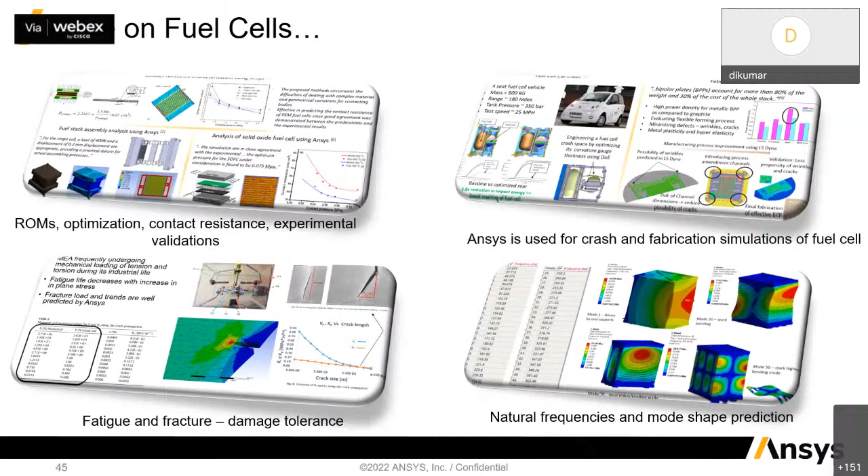Even for this demo, we've taken one more step which I won't be able to show in today's presentation - doing a dynamic analysis to predict the natural frequencies. So that's all from my side as well. Thanks for your time and for patiently listening to this presentation.

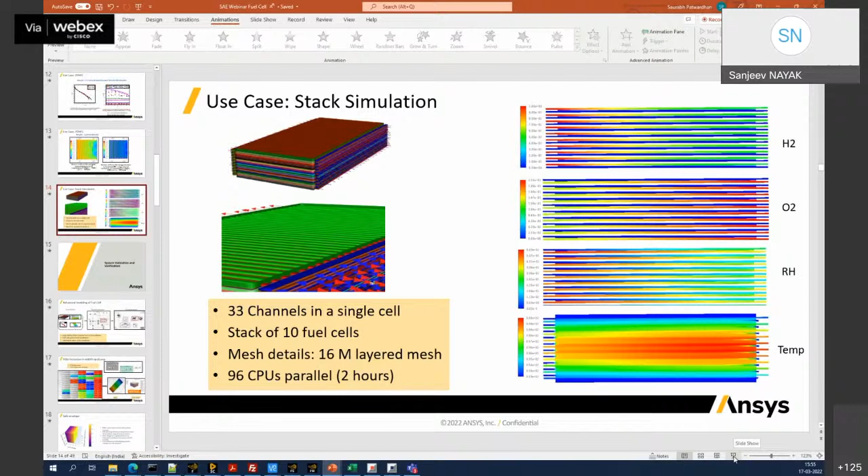I have one query about the stack design and temperature variation. In what you showed, there was a temperature difference from one point to another, and at the same time the current density variation was also shown from one end to the other. So when all the stacks are uniformly supplied by the hydrogen fuel at a constant flow rate, how could there be a variation in temperature from one end to the other?

Okay, so basically every stack is a reactor - hydrogen reacts with oxygen to produce electricity. A byproduct of that reaction is not just electricity but also heat. So you have heat generated in every cell. But this surface is exposed to the atmosphere, which is at a lower temperature, so there's more heat transfer from here. That's why there is a gradient in the fuel cell stack as you go from top to bottom.

So here the heat did not have enough chance to dissipate quickly compared to here. So this one is at a lower temperature because it is exposed to atmosphere, and this one is not. And once you have this temperature gradient, the temperature is in turn going to affect the electrochemical reactions, and that's why you have different consumption rates for hydrogen and oxygen across the stack. So that's how the variation actually takes place.

You mean to say because of the ambient temperature, there is an effect of the external, end plates are being better cooled and the insides are not properly cooled? Yes, correct. Okay. And another thing, what could be the operating temperature of this fuel cell as you have mentioned? 80C. For this example, it is 80C. Okay. This is PEMFC, low temperature PEMFC. Yeah. And how about the stack? So they are all vertically mounted, right? All stacks are vertically mounted, yes. Okay.

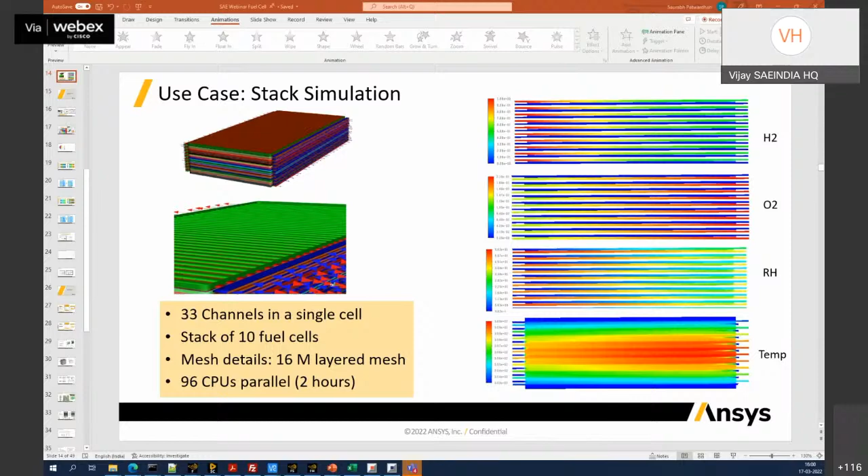Thanks, Dr. Saurabh. And Dr. Arun Sambat has asked two things. First, he wants to know whether you have models for balance of plant, and he also wants to know if there are case studies on HFC simulation for ground level and high altitude level. For example, Leh, Ladakh.

Thank you, Dr. Saurabh. We have a question from Arnab Ganguly. How was the contact created for multiple cells? Was it through some external macro or does ANSYS have an inbuilt macro? Sorry, is that a question for me or Dinesh? Yeah, it is for me. So contacts, yeah. We have an inbuilt function where you can set the tolerance and say that if two surfaces fall within this tolerance, pick them and create a contact. So it's very helpful. It's already inbuilt. There is no additional macro script we need to write.